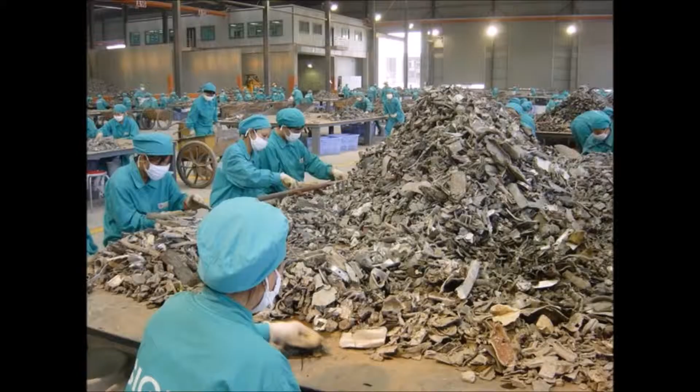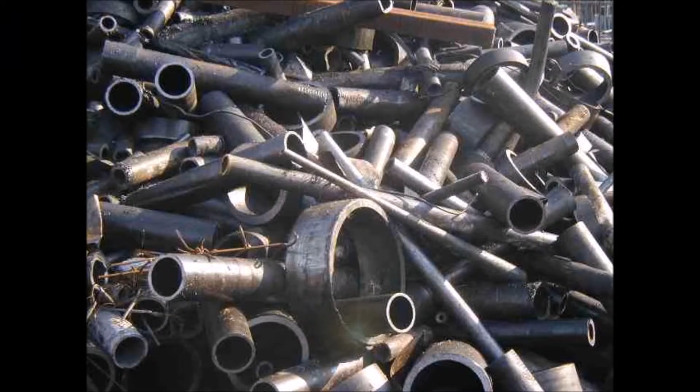of reinforced steel bars used in structural buildings. The first step in the process is to inspect the raw materials from three main sources. First are the iron cast taken from the suppliers. Next are the metal scraps from junkyards.

And last are the rejects of the laboratory tests from the previous process. The workers are all prone to the hazards of the metal scraps, which is classified as safety. As a precaution, they are required to wear gloves and goggles to avoid being punctured or wounded by the metals.

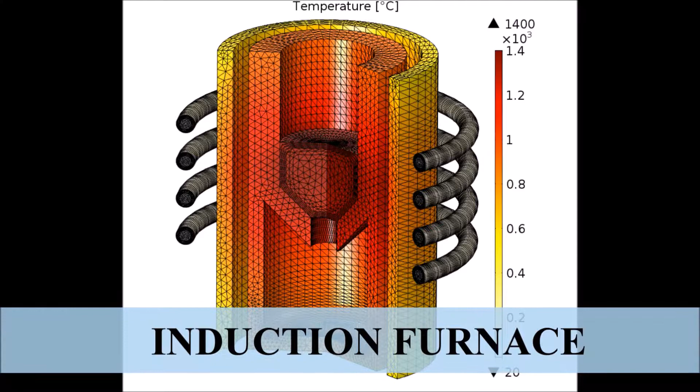Once the metals are properly sorted, they will be brought to the induction furnace, where they will be melted together by using electromagnetic induction or heat-producing coils. This furnace will then produce a liquid, unrefined metal where it still has impurities.

The workers are exposed to heat radiated by the equipment, metal scraps as it is placed into the furnace, and improper clothing. These are classified as physical and safety hazards. As a precaution, they are required to wear heat-resistant clothing, safety goggles, and safety gloves.

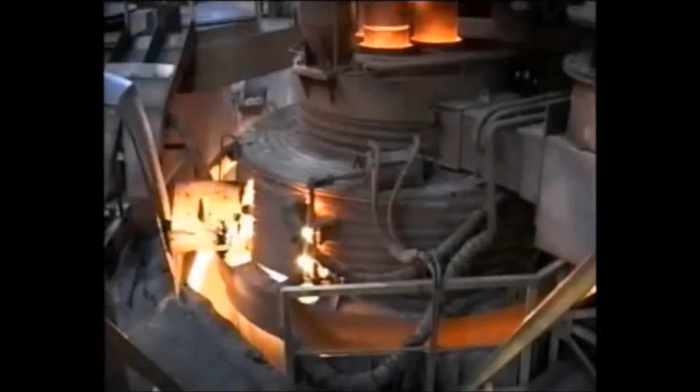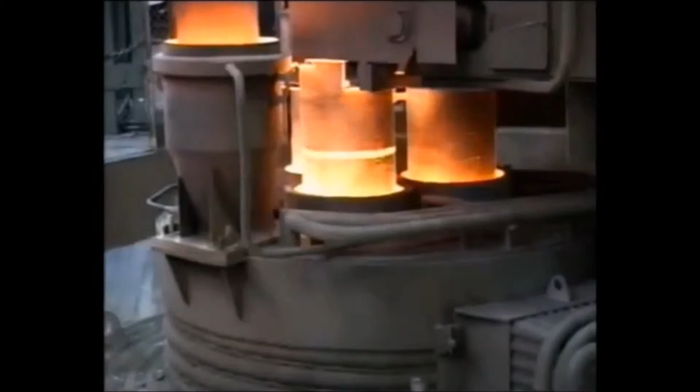This is where the ladle refining furnace will be used. To remove the active impurities of the liquid metal, it will be subjected to a vacuum container, which will be heated at a high temperature of 1570 degrees Celsius to allow silicon, hydrogen, and oxygen to resurface.

The workers are exposed to heat radiated by the equipment, metal scraps as it is placed into the furnace, and improper clothing. These are classified as physical and safety hazards. As a precaution, they are required to wear heat-resistant clothing, safety goggles, and safety gloves.

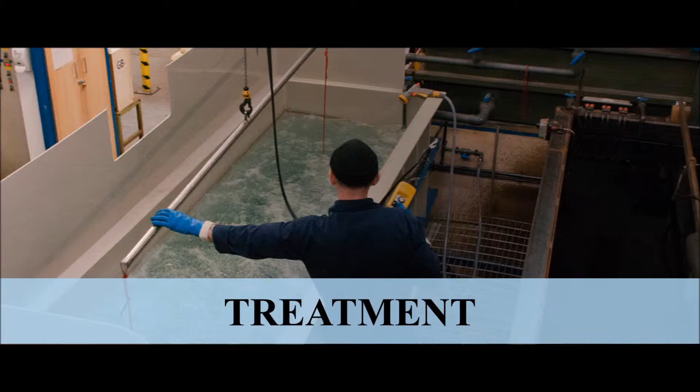Since the furnace only removes active impurities, it will be placed back to treatment to remove sulfur and phosphorus, which will be done in the next process.

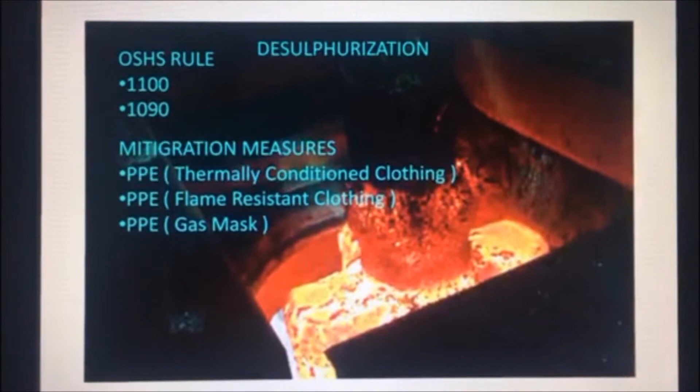Roslyn Antipalataw, and I'm going to discuss the treatment, casting, and cooling process of steel bar. Desulphurization.

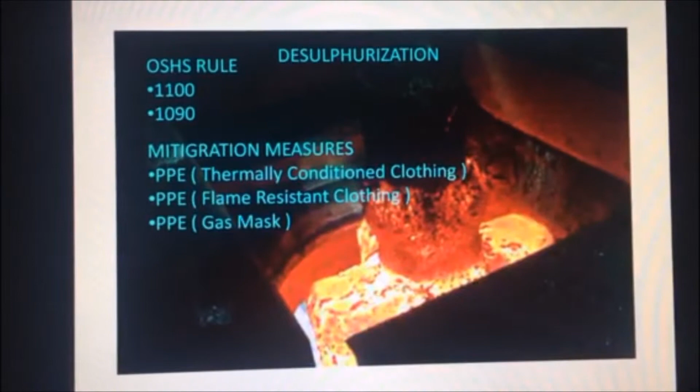It is a chemical process for the removal of sulfur from a material. This involves either the removal of sulfur from a molecule or the removal of sulfur compounds from a mixture. Sulfur affects both internal and surface quality of steel.

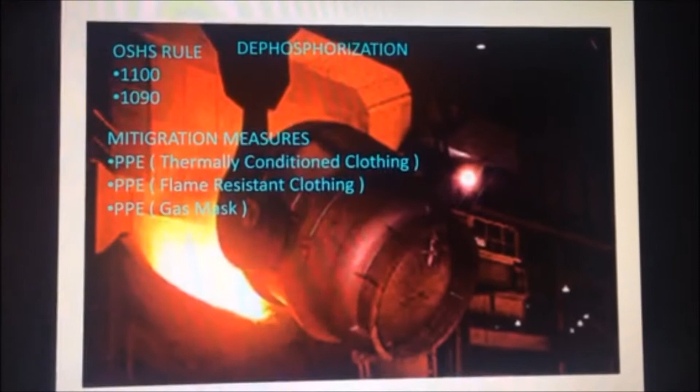Next is dephosphorization. It is a very important metallurgical technique in the steel making process to produce high quality steels. It is also the removal of phosphorus from a metal during smelting.

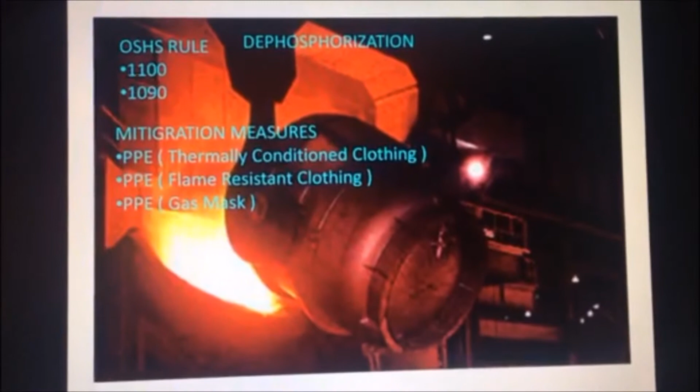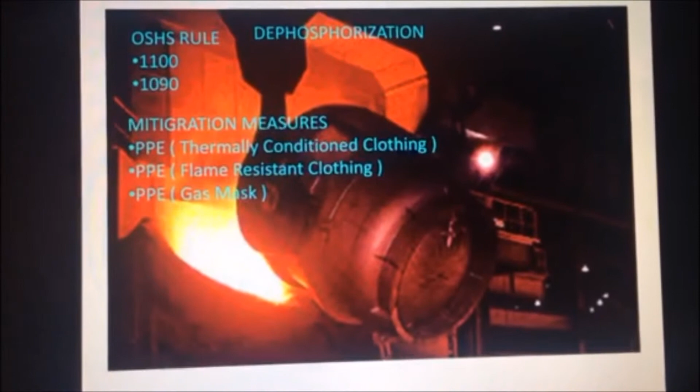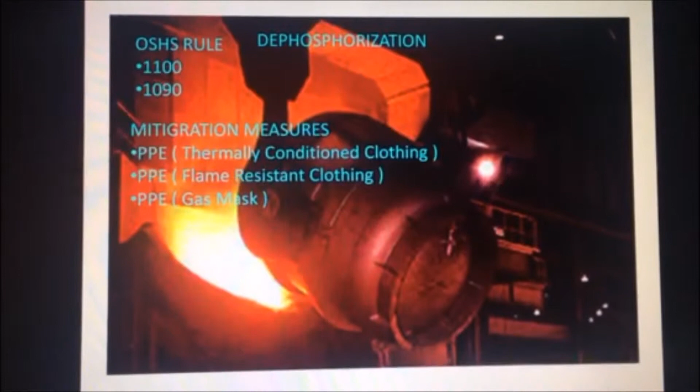The hazards in the treatment process are heat radiated by the equipment, refined liquid steel, lime, sulfur, phosphorus oxide, calcium fluoride, etc. The classifications are physical, safety, and chemical. The mitigation measures are PPE thermally conditioned clothing, PPE flame resistant clothing, and PPE gas mask.

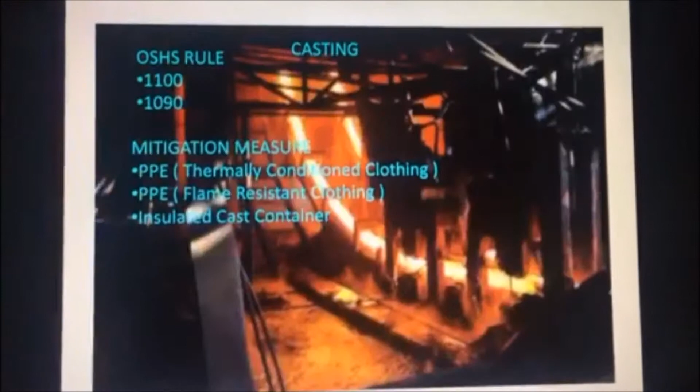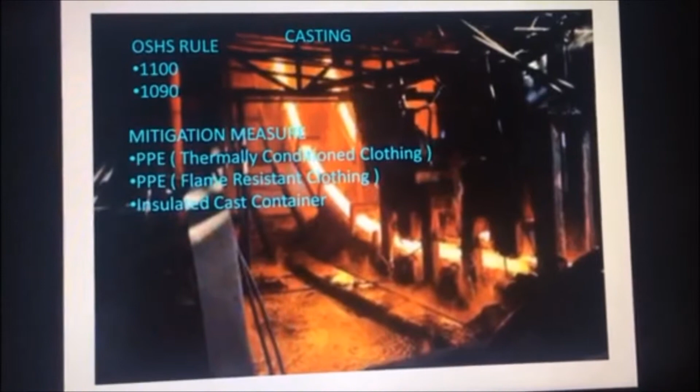After the treatment process, next is the casting process, where the liquid steel is poured into a mold which contains a hollow cavity of the desired shape, and then allowed to solidify. The hazards in this process are heat radiated by the equipment, liquid steel, and casted metal high temperature.

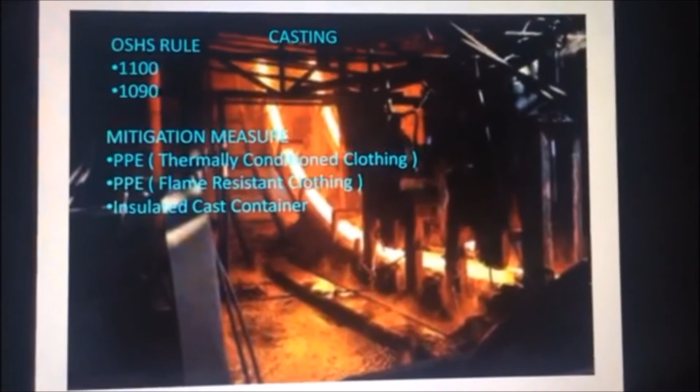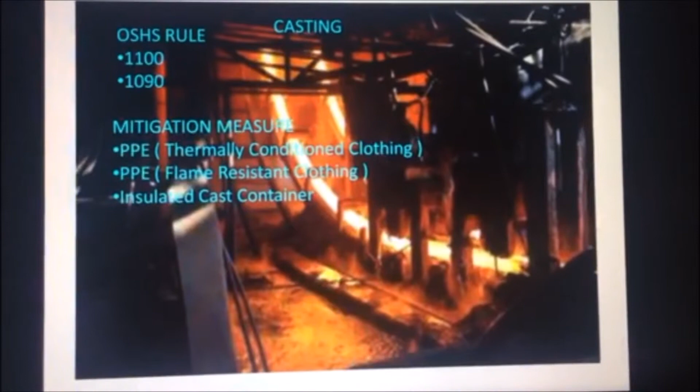The classifications are physical and safety. The mitigation measures are PPE thermally conditioned clothing, PPE flame resistant clothing, and insulated cast container. Next process is the cooling tower.

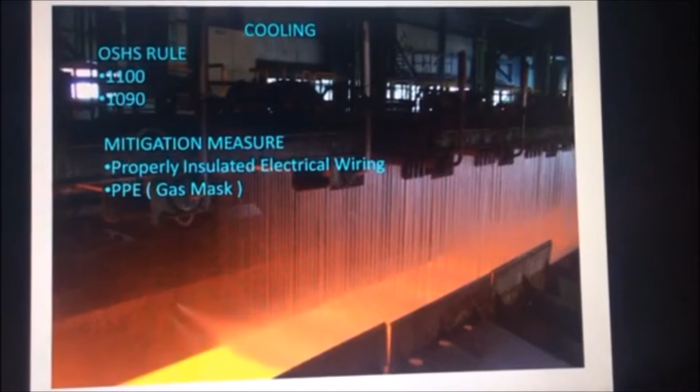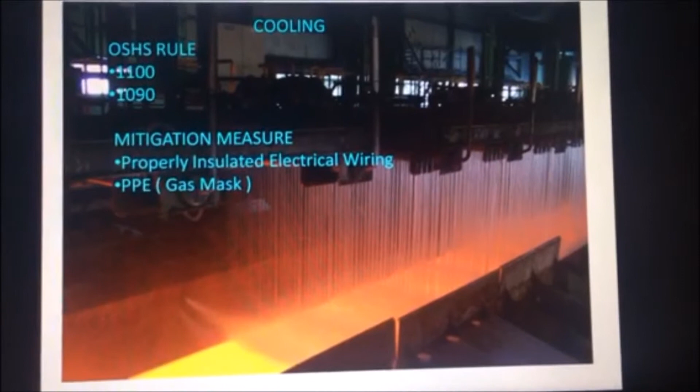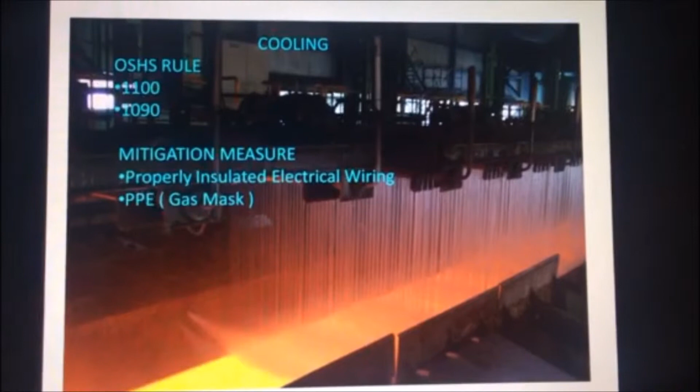Cryogenic hardening is a process where the material is cooled to approximately negative 185 degrees, usually using liquid nitrogen. It can have a profound effect on the mechanical properties of certain steels, provided their compositions and prior heat treatment are such that they retain some austenite at room temperature. The hazards in these are electrocution and nitrogen, while the classifications are physical and chemical.

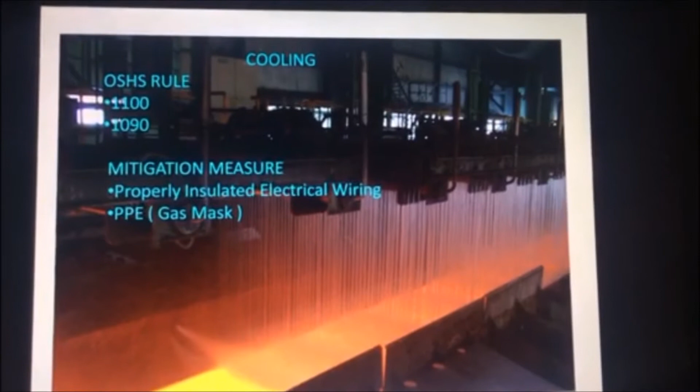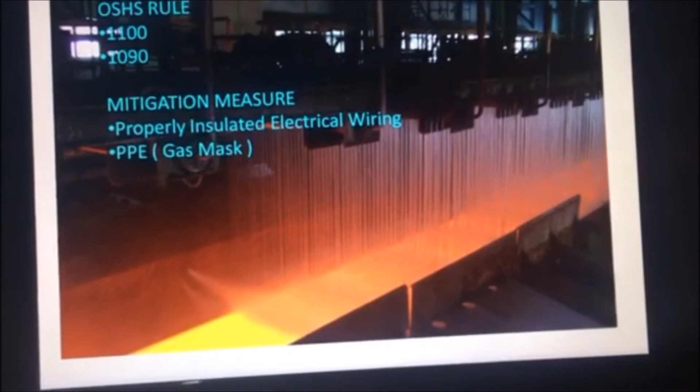The mitigation measures are properly insulated electrical wiring and PPE gas masks. The output from the previous process will now undergo the process of reheating furnace.

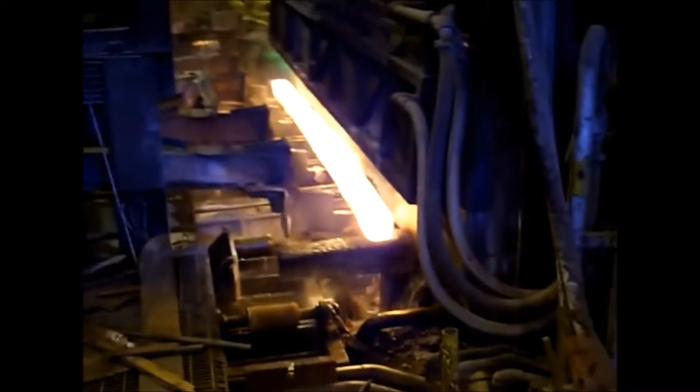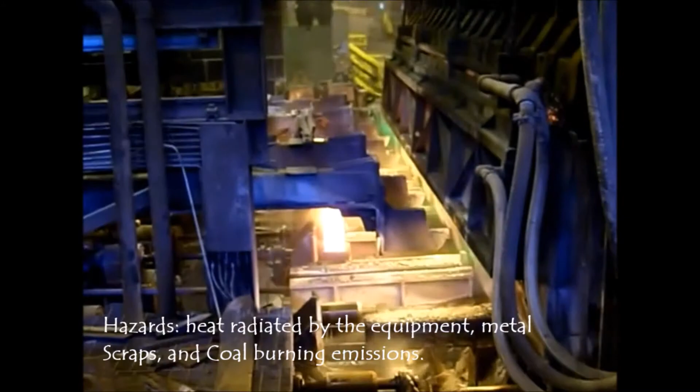This process will require the use of coal and will emit substances such as coal ashes, sulfur oxides, nitrogen oxides, carbon monoxides, PCDD or PCDF, or polychlorinated dibenzodioxins, simply dioxins. The hazards that this process produces are heat radiated by the equipment, metal scraps, and coal burning emissions.

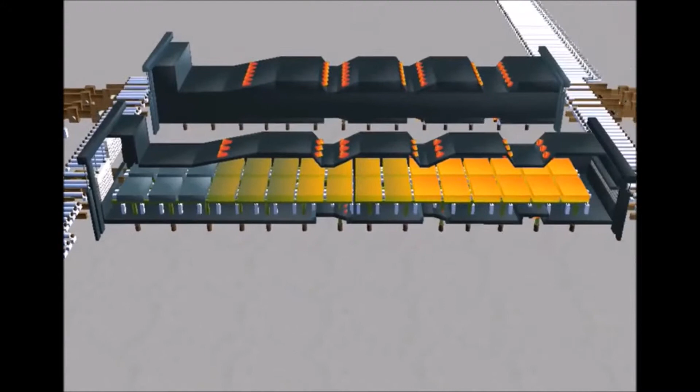Reheating furnaces are used in hot rolling mills to heat the steel to temperatures of around 1200 degrees Celsius, which is suitable for plastic deformation of steel and hence for rolling in the mill. The heating process in a reheating furnace is a continuous process where the steel stock is charged at the furnace entrance, heated in the furnace, and discharged at the furnace exit.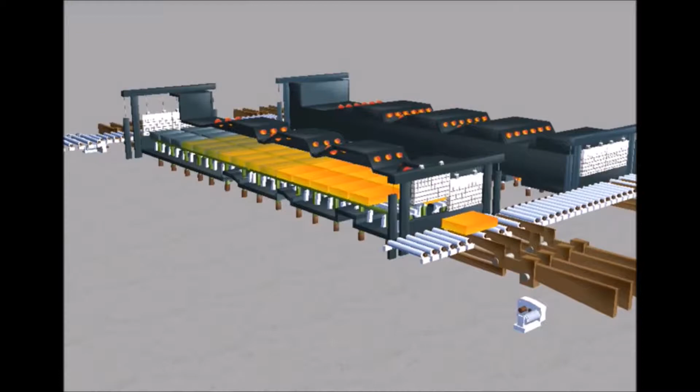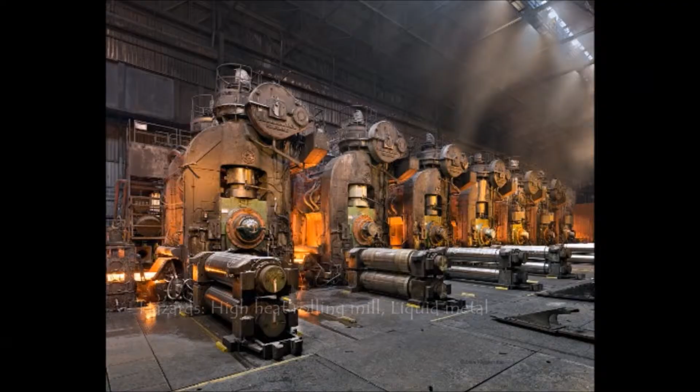Heat is transferred to the steel stock during its traverse through the furnace mainly by means of convection and radiation from the burner gases and the furnace walls. After it undergoes the process of reheating, the output will be liquid steel. The liquid steel will now undergo the process of rolling. It may either go through plain or deformed rolling mill. The hazards produced by this process are heat from the rolling mill and liquid metal.

Rolling process is one of the most important and widely used industrial metal forming operations. It provides high production and close control of the final product. Rolling of steel is a metal forming process in which steel is passed through a pair of rotating rolls for plastic deformation of the steel.

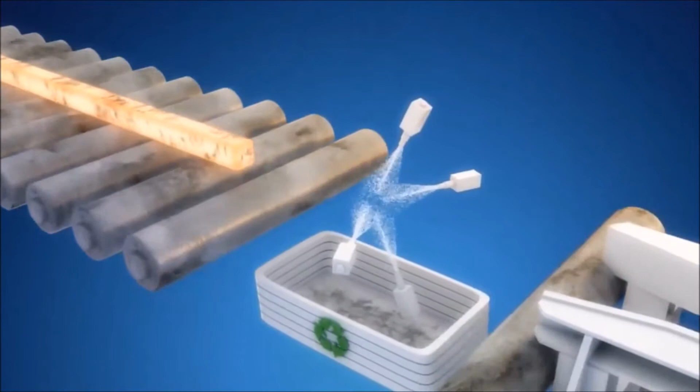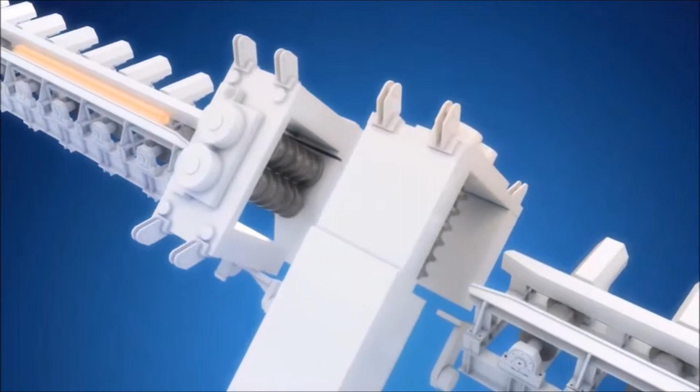Plastic deformation is caused by the compressive forces applied through the rotating rolls. High compressive stresses result from the friction between the rolls and the steel stock surface. The steel material gets squeezed between the pair of rolls, as a result of which the thickness gets reduced and the length gets increased.

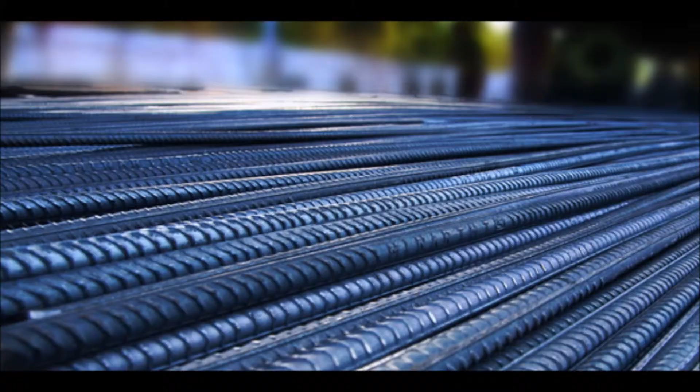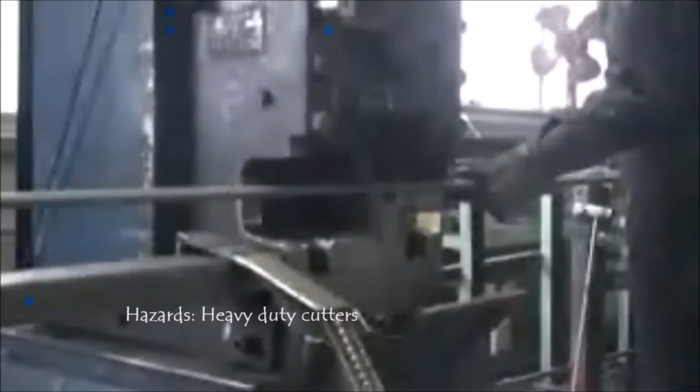As the liquid steel finishes the process of rolling, it will now be produced as plain or deformed steel rods. These steel rods will now undergo the process of cutting. In this process, the rods will be cut into various lengths. From this process, the solid waste such as excess steel will be separated from the products. These products are now called the pre-cut plain or deformed steel rods.

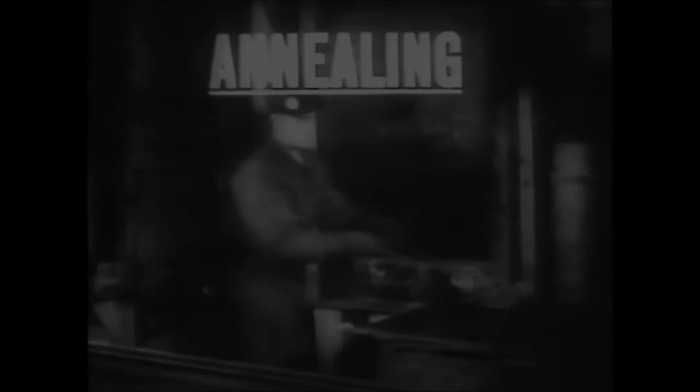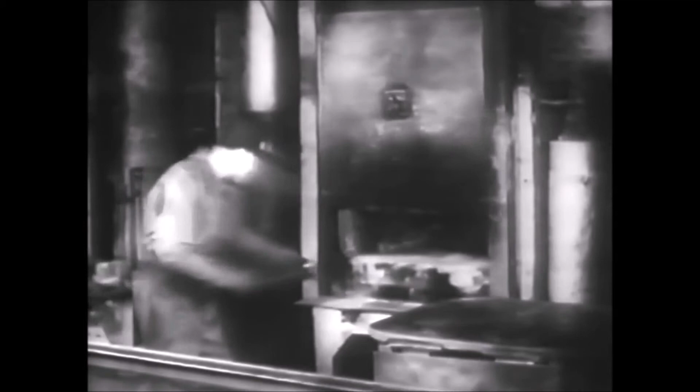After the pre-cut plain and deformed bars exit the cutting procedure, the curing procedure comes next. The curing process is divided into two parts: annealing and cryogenic cooling. In annealing, employed to relieve stresses and to increase ductility, heat uniformly, in the case of full annealing, to about 75 degrees Fahrenheit above the steel's upper critical temperature and cool in the furnace. Thus, through controlled heating and cooling, specific changes in the properties of steel are achieved.

Cryogenic hardening is a cryogenic treatment process where the material is cooled to approximately minus 185 degrees Celsius, or minus 301 degrees Fahrenheit, usually using liquid nitrogen. It can have a profound effect on the mechanical properties of certain steels, provided their composition and prior heat treatment are such that they retain some austenite at room temperature. It is designed to increase the amount of martensite in the steel's crystal structure, increasing its strength and hardness, sometimes at the cost of toughness.

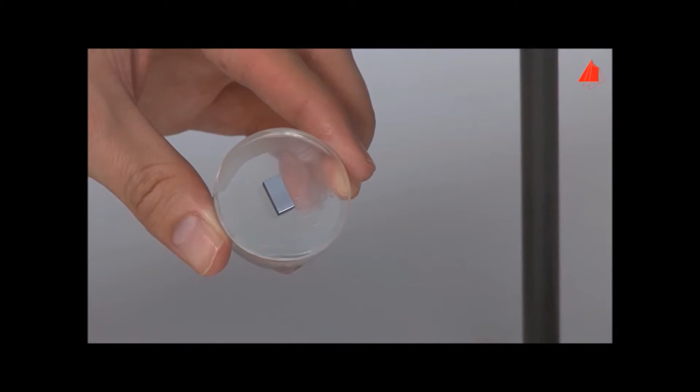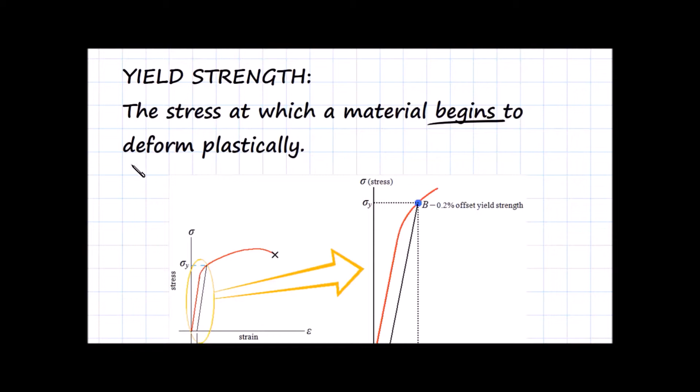The end result of the curing process is the cured and cooled steel rods. These were next subjected to several laboratory tests, which are composed of metallographic tests, where the amount of iron and carbon present in the samples were determined; and yield strength test, wherein the yield strength against the maximum tensile and compressive stresses that the steel can take in while still being able to return to its original state were determined.

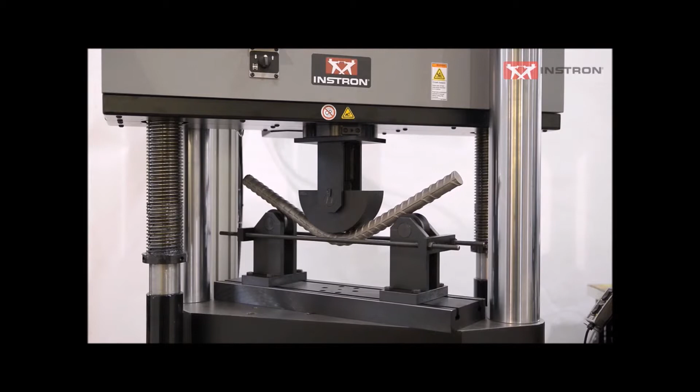Tensile strength test, wherein the ultimate strength or the tensile strength of the steel against the maximum force that the steel can withstand before it fractures was determined; and lastly, the flexural bending test, where the flex or bending properties of the samples were determined. The rejects that didn't meet the specific standards from any of these tests were returned back to the scrapyard, while the approved ones were delivered to the next step.

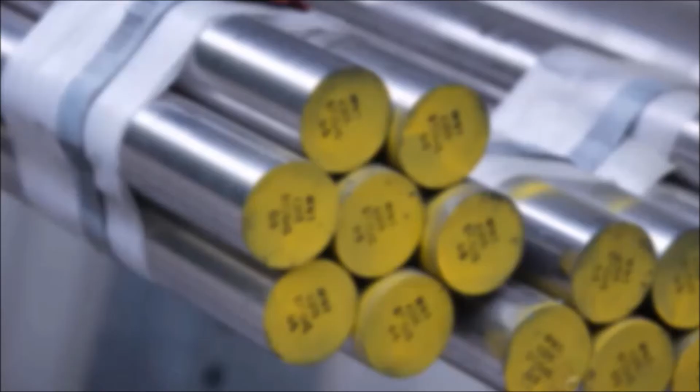This is a process where various steels are classified by their composition and physical properties, while labeling is a process where graded steel rods are colored based on their grade. In this process, steel rebar products are identifiable through the company logo, which is hot-rolled and embossed onto each bar at specified intervals. The bar size mark, which specifies the nominal diameter of the bar, is also hot-rolled adjacent to the company logo.

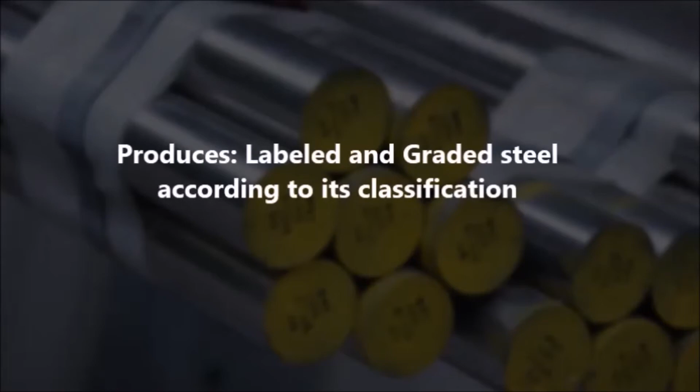Mitigation measures include scheduled supervision and machine guarding. The hazards and their classification: cluttered workspace is classified as ergonomic, while the hydraulic stamper is classified as safety.

As the graded and sorted steel rods enter the packaging process, vacuum plastic color-coded based on grade enters the machine, and the excess plastic tabs are considered solid wastes.

Mitigation measures include scheduled supervision and machine guarding. Hazards and classification: cluttered workspace is classified as ergonomic, and industrial cutters are classified as safety.